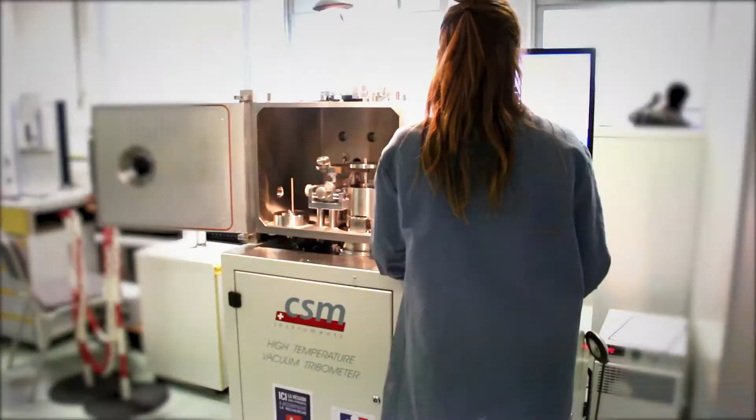Well integrated in the core of the research lab network of École des Mines, ICA Albi is an active member of the Carnot Mines Institute too. ICA employs 250 people, 70 located in Albi. They develop research programs on the mechanics of materials, manufacturing processes, structures and systems, mainly on aerospace applications.

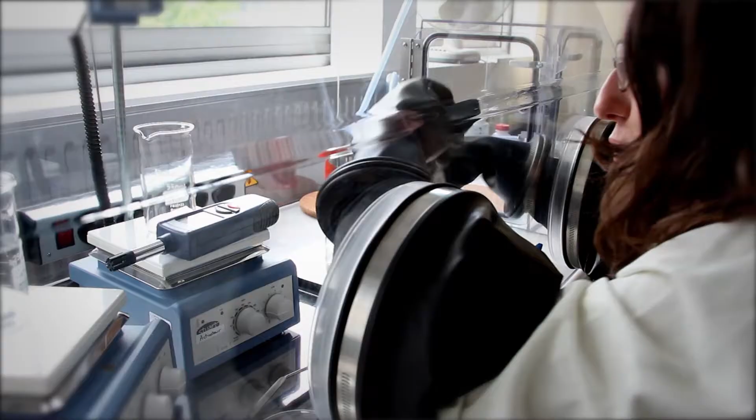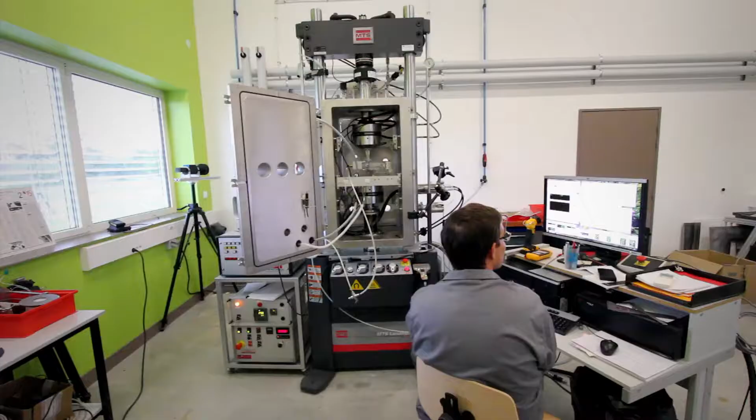In Albi, research topics mainly deal with new materials and manufacturing processes, toolings for forming and shaping materials, non-destructive measurement techniques based on optical sensors. More than 80% of our activity is made with industrial partners, and a significant part is developed in close collaboration with academia at different scales.

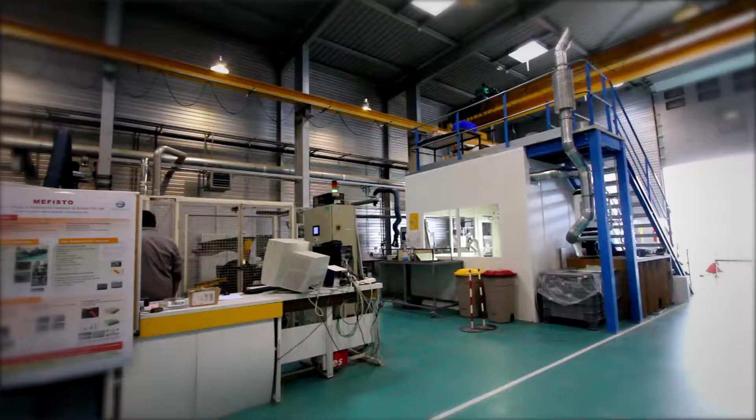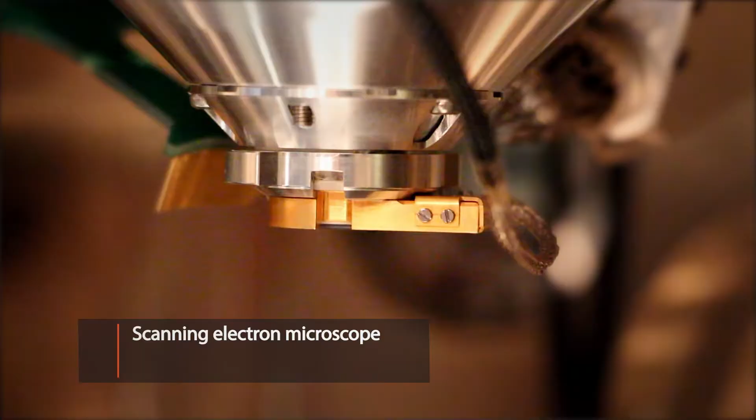Our facilities are installed in 2,000 square meter premises, including research laboratories and the platform Mimosa for aerospace materials, manufacturing and active monitoring. Some facilities are dedicated to materials characterization, transformations upon manufacturing and engineering properties. They include optical, confocal and electron microscopes.

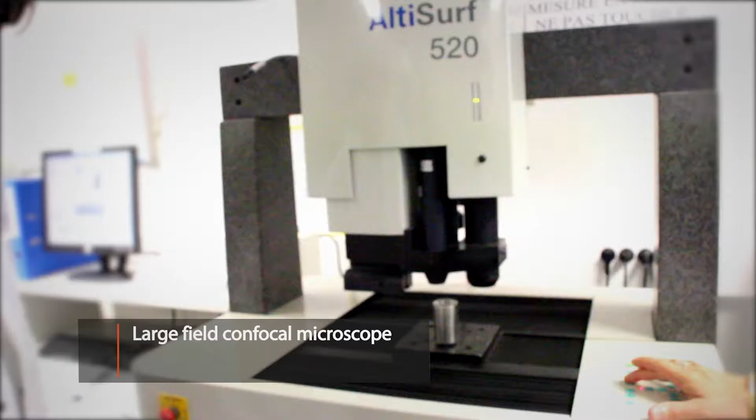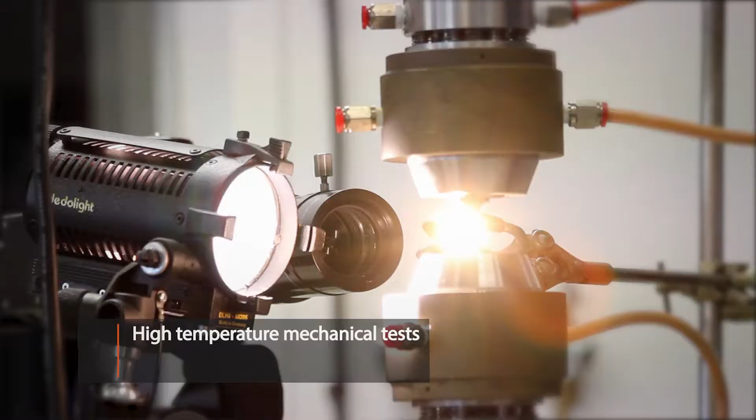Ten mechanical testing machines allow characterizing materials up to 1600 degrees. The high-temperature investigation of materials is conducted using standard tests, but also specific laboratory-made tests.

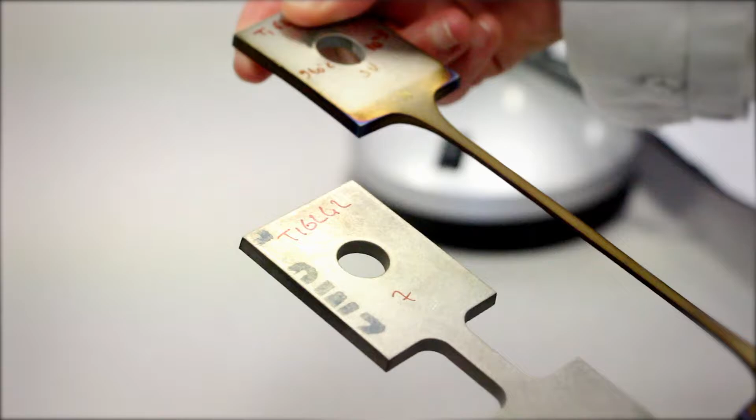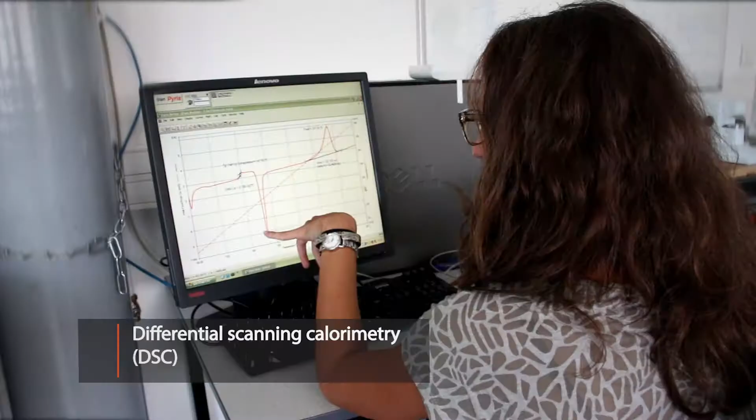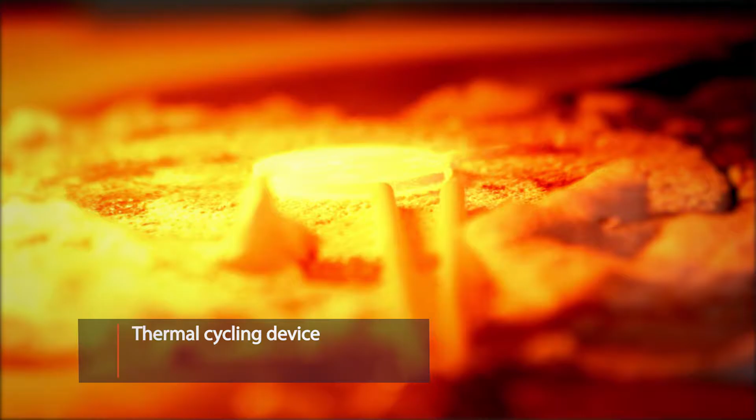Beyond mechanical testing, activity extends to physical, chemical and metallurgical transformation versus temperature using DSC, TGA and X-ray diffraction, oxidation and corrosion, thermal fatigue and high-temperature wear and tribology rigs, thermal treatment furnaces.

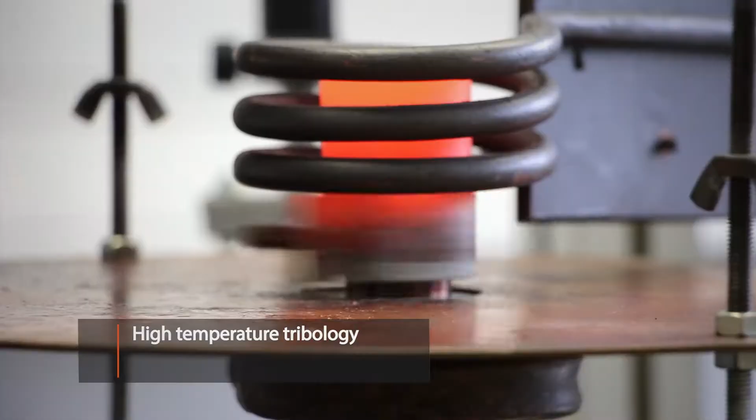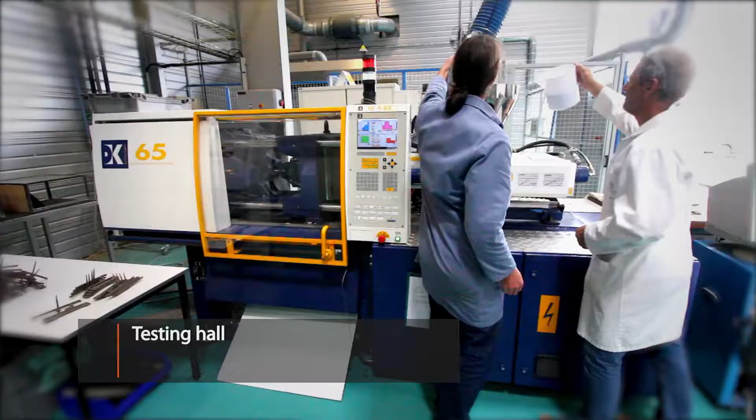Other important facilities deal with process pilots, often developed in the lab and implemented to investigate processing at the industrial scale. For instance, the injection press for short fiber composites or the rig for liquid processing of long fiber composites.

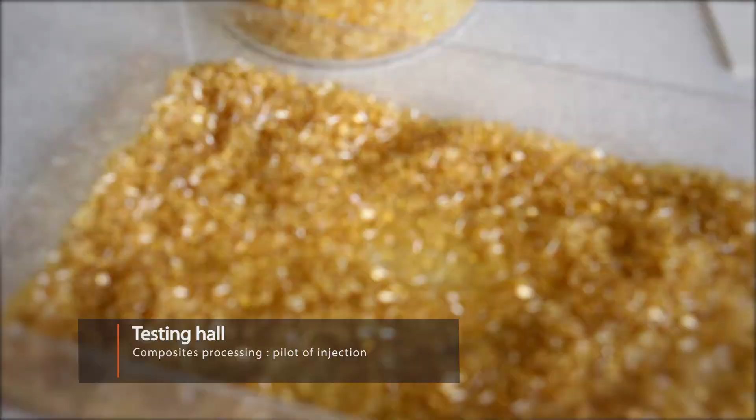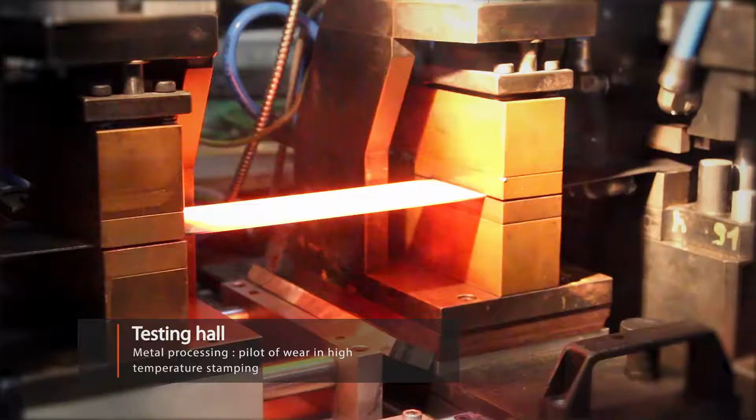Some pilots have been specially designed for duplicating critical loading conditions of a given process. This is the case of our facility to study wear of the high-temperature deep drawing and cutting tools for high-performance steels.

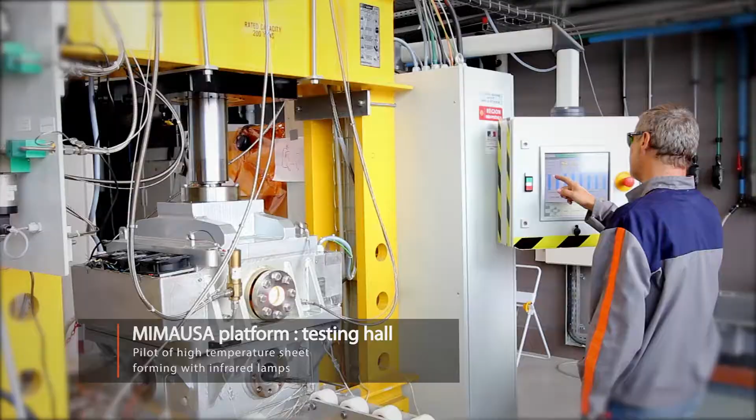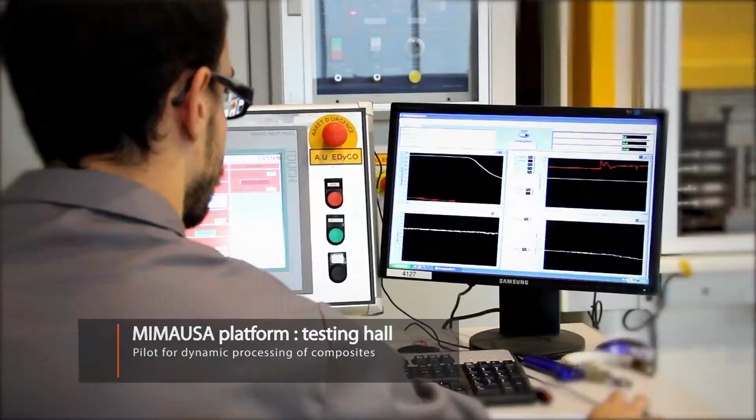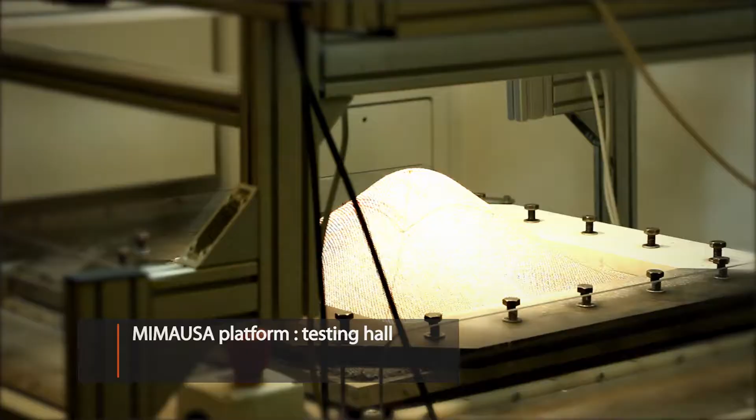Platform MIMAUSA is dedicated to emerging processes for which scientific and technical gaps are still significant to get over before they are properly used in industry. Investments were made to acquire equipment both implemented in small, medium and large-size companies our conventional partners.

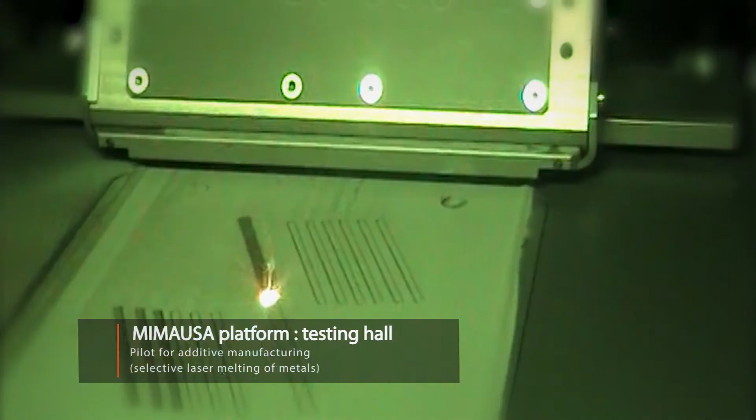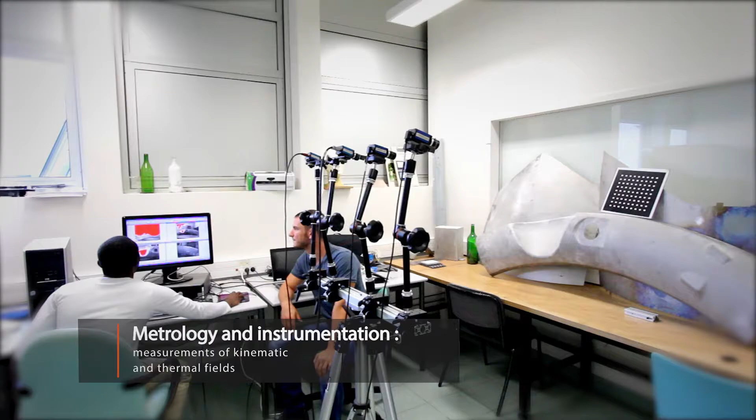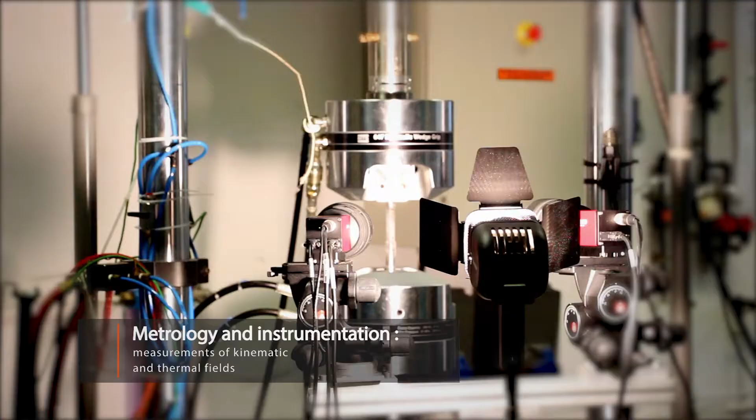Relative to metrology and instrumentation, active monitoring is one major topic developed at MIMAUSA. Optical sensing for measuring kinematics and temperature field distributions is a strong research activity of ICA, which runs a large number of stereo vision rigs, cameras, pyroreflectometers devoted to develop new measurement methods, often implemented on our test facilities.

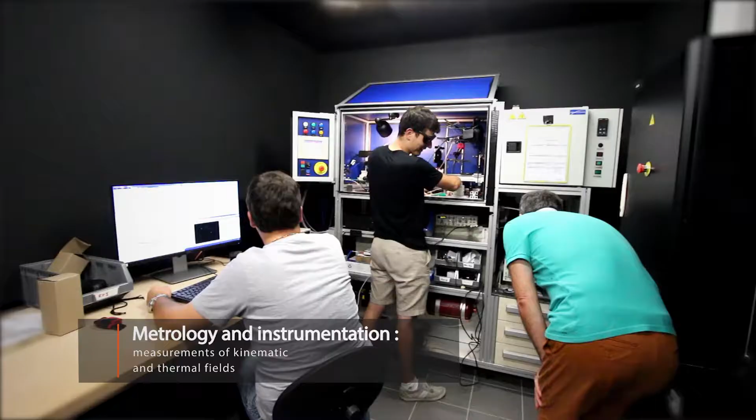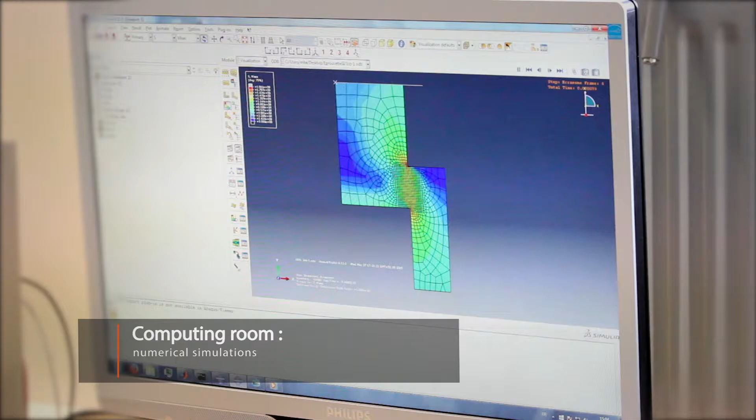Numerical modeling and simulation often extend our research activities, giving a beneficial and often necessary balance between an experimental and a numerical approach. On the one hand, modeling involves prevalent phenomena and mechanisms allowed to compare to those observed experimentally. On the other hand, modeling and simulation is now essential in the industry, for instance, to predict the behavior of a material or a part upon manufacturing and/or service.

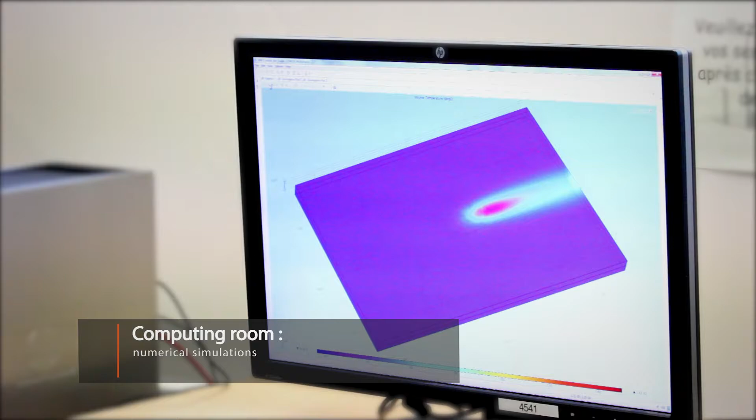This synthetic presentation of Institut Clément Ader Albi is now concluded.